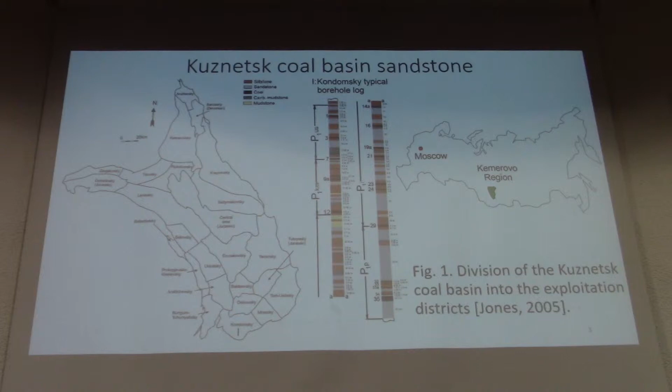So this is like the final aim of the work: to build the mathematical model which gives you an opportunity to describe this fracture process of the sandstone specimens. And of course other rocks also, because they may have different physical mechanical properties, but they obey some general trends of mechanical behavior.

Recently Farrokhrouz et al. reported data on the uniaxial compression strengths of sandstone depending on different pore content. As you can see, the scatter is awful to my mind, because you can have a discrepancy of the data plus or minus 100 MPa at the same porosity.

This scatter is obtained from data collected from, I don't know, maybe more than 1,000 specimens around the world from different sandstone deposits. In the Kuznetsk deposit, as you can see, we have pretty weak sandstone. If we plot this data on this scatter, it will be right here in the lowest part. But the discrepancy of data is not very high, so we can basically approximate this with an exponential curve.

What is going on? Basically, sandstone and rocks poorly can have tensile stresses inside of the material, but still, never mind - uniaxial compression tests are the most commonly used for investigation of rock mechanics behavior.

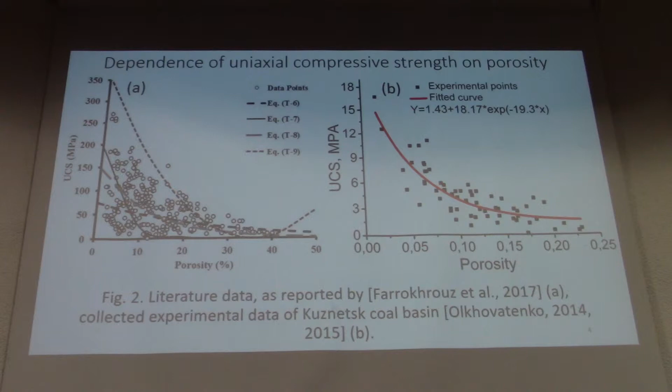What should we account for? The first step: we have to account for microcrack closure in the case of positive pressure, and microcrack opening in the case of negative pressure.

The second one, we need to more generally account for the pressure sensitivity of these materials. The next stage, we have to account for the dilatant behavior. We have to account for structural impurities, pores basically, and the next one, we have to formulate the yield or failure envelope, and then account for accumulation of damage, and what is more important, the corresponding degradation of the physical mechanical parameters.

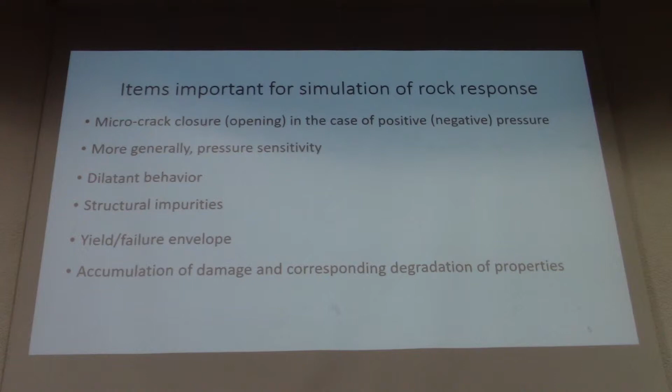Hoek and Martin recently reported this schematic loading diagram. In the beginning, as you can see, there is non-linearity, which is related to micro-crack closure. This is basically the first stage of simulation - somehow we need to describe this process. Here in the slide you can see this initial non-linearity, and right at this point, approximately, this micro-crack closure is finished.

So this is like a multimodulus theory, nonlinear elasticity, and one of the effective ways to describe this process is to account for the change of the bulk modulus of the material. Here, this is the current pressure, this is P0, the level of hydrostatic pressure when the microclosure occurs. And this is the phi parameter, the volume of microcracks which is closed under a certain hydrostatic pressure.

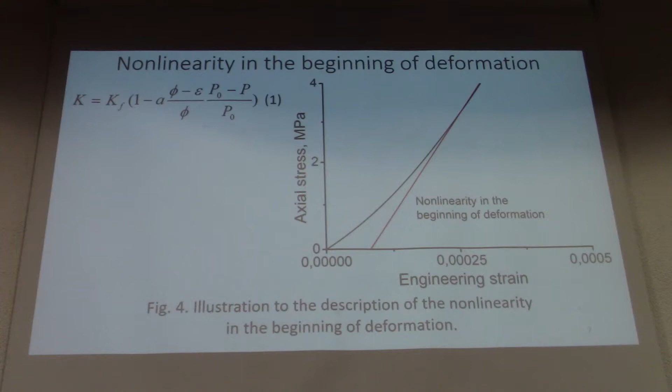That's what we have. If we use this equation, we can describe this initial nonlinearity. Here you can see the values of the parameters which I used in simulation.

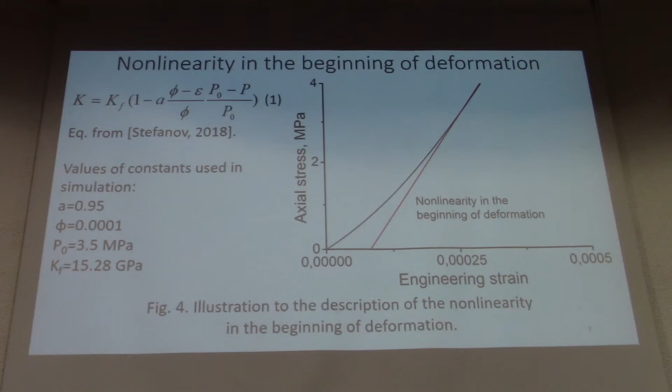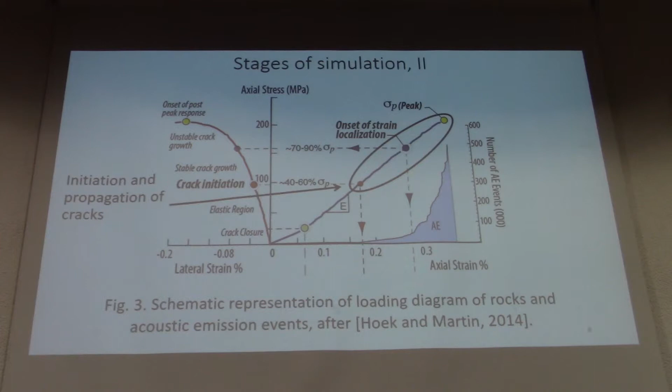The next one is basically the elastic region. It's not very interesting to my mind because nothing happens at this stage, it's just described according to Hooke's law. The more important part begins from the initiation of crack, which is basically 40 to 60% prior to the peak stress. So the next stage of simulation, we need to describe the initiation and propagation of cracks.

So how are we going to do this? As I said, we have to build the yield envelope, and as it is known that rocks basically obey pressure-sensitive behavior, one of the suitable models for description of their behavior is the Drucker-Prager yield envelope. We also utilize the non-associated flow rule, because experiments show that the dilatant factor and the internal friction factor both basically do not coincide.

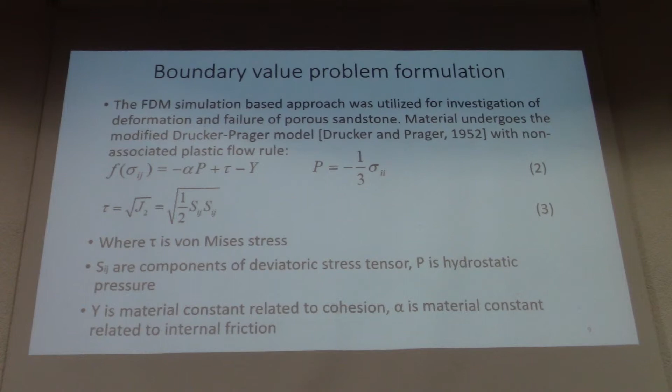What is next? If we take this non-associated plastic flow rule, it is written in this way. If we derive this equation according to the basic equation of theory of elasticity, then we get the increments of components of inelastic strains. And we have the increments of inelastic strain intensity and the increment of dilatancy. So somehow we describe this process.

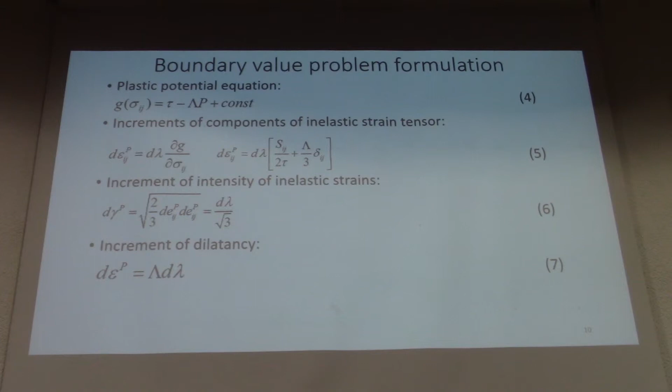What is next? First of all, the material could not experience infinitesimal expansion, that is why the dilatant factor and internal friction factor could not be left as constants. They need to somehow evolve during the deformation. For the sake of simplicity, I use exponential dependencies.

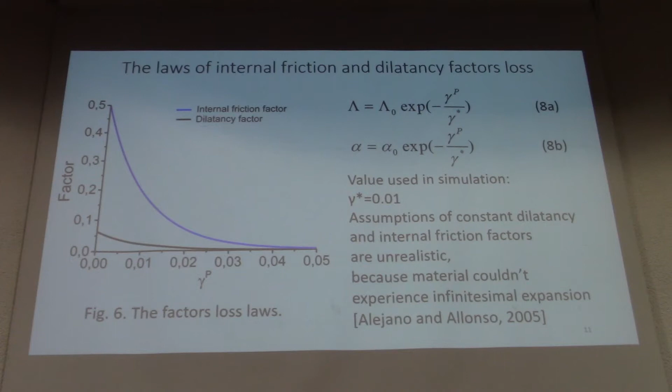And if the accumulated intensity of inelastic shear strains reaches the critical value, gamma star, then it means that the dilatant factor and internal friction factor decreased by E. This is referred to in this very good review by Alejano and Allonso. They picked up experimental data on different rocks, and it proves that these factors could not be left as constants.

The next one is we have to account for the damage accumulation, which causes the degradation of cohesion of the material. In this work we used this simple equation.

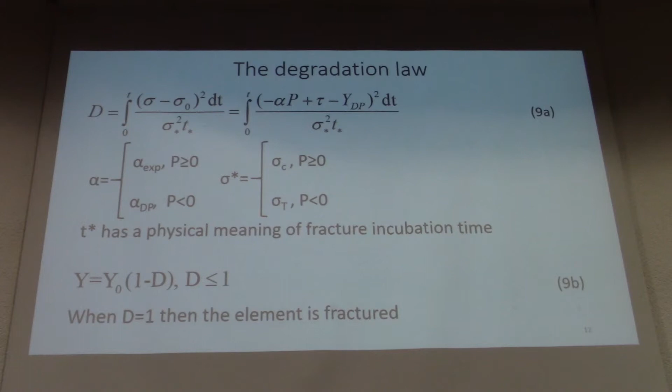The next one is the structural inhomogeneity, and also we can take a look at this publication. This is one of the reviews recently reported by Zhang, and what they found is they looked through different dependencies of the pores, and basically they obey the log normal distribution. Of course we didn't focus on the same deposit of sandstone as Zhang et al., but this is like a general law - the pores are distributed according to the log normal law.

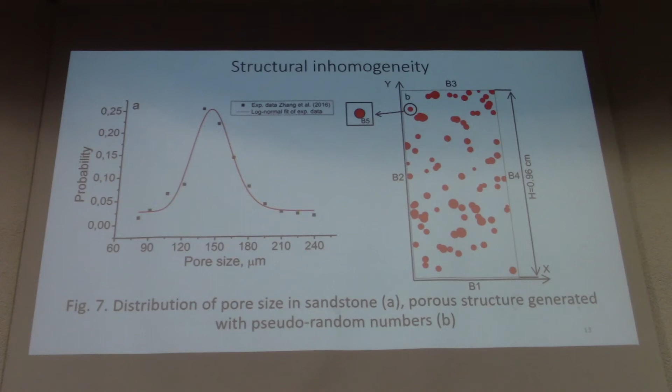If we take into account this distribution diagram and then use the pseudo-random number generator, we can generate a computer-aided design of the internal structure of the sandstone. If we use this diagram, we can have this structure generated and then use it for simulation. Of course this is like a model, because basically the pores don't always look like spheres, sometimes they have more complex geometry, but for modeling it's fine.

If we take a look at the actual compression, we performed a test simulation on this structure. It has approximately 12% porosity, and as you probably know, the real condition of loading lies between free sliding and confined sliding. So we performed both, and as you can see, in the case of confined sliding, the fracture process is more controlled by shear strains. There are also tensile cracks in the final failure pattern, but I would say it's more controlled by shear plastic strains.

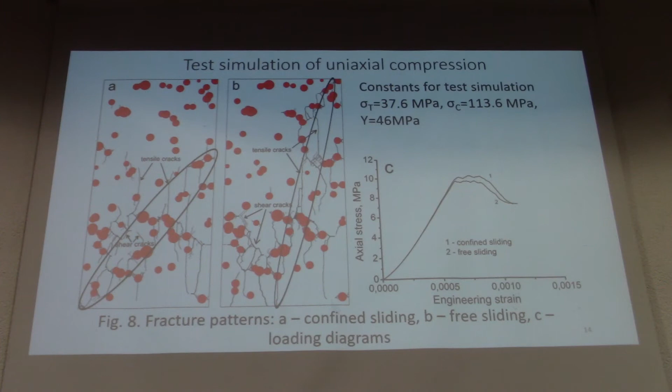In the case of free sliding, we generally have more tensile stress, so it is more controlled by the mode 1 fracture pattern. For the following simulation, I decided to stop on the free sliding case because, to my mind, it was more representative.

If we take a look at the stages of deformation: the first is micro crack closure, the second is initiation of cracks, the third is initiation of the softening region, and then we have coalescence of cracks and turn to the residual strength of the material.

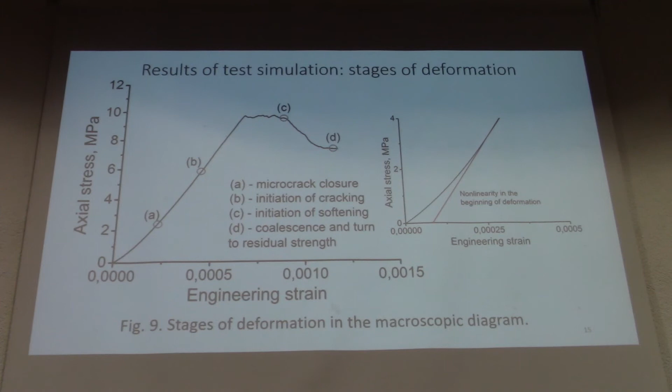If we compare these stages of macroscopic failure on the loading diagram with the fracture patterns corresponding to these points, we will see this: stage B is the initiation of cracks, then stable crack propagation, here the beginning of the softening region, and after that the unstable cracking and coalescence of cracks into the macroscopic one.

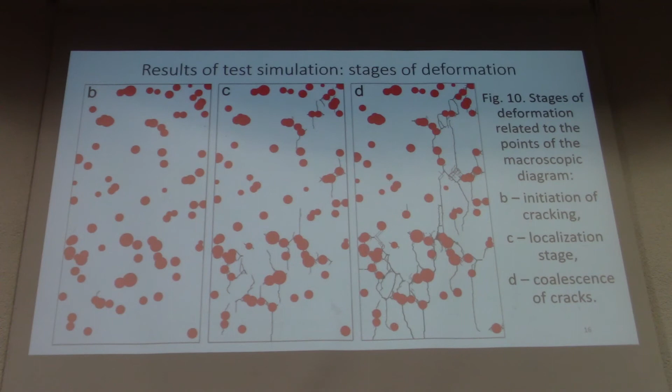Using this pseudo-random number generator, we can simulate different pore content and perform the same uniaxial compression test. We changed the porosity basically from 1%, and there is no diagram here, but from 6% to approximately 25%.

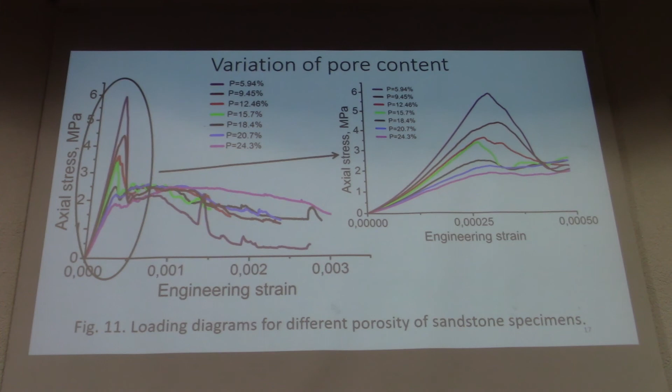What is more important, to my mind, is that if we take a look at peak deformation, not only peak stress, we see that increasing porosity leads to more viscous behavior of rocks, because the critical strain appears higher in the case of porosities higher than 20%.

A few more slides and I finish. If we plot the dependence of Young's modulus on porosity, it is pretty well described by an exponential function, and the dependence of uniaxial compression strength on Young's modulus is described by a polynomial function of the second order. Sometimes it is described by a linear function, so it depends on conditions.

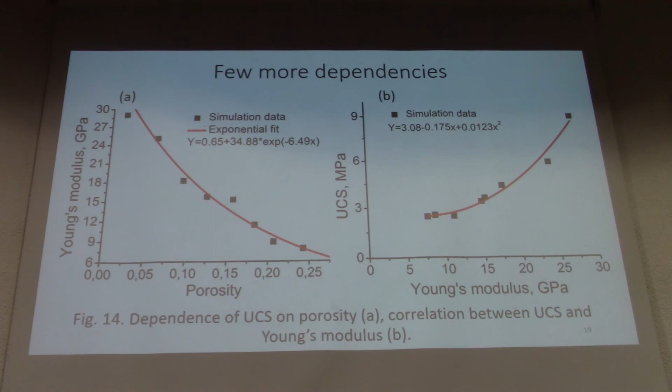One more thing I wanted to show you: a simulation of acoustic emission. If we calculate the counts of fracture, we see that the highest rate of energy release occurs on the downfalling part of the loading diagram. Then, when we return to the residual strength, this energy release rate basically decreases.

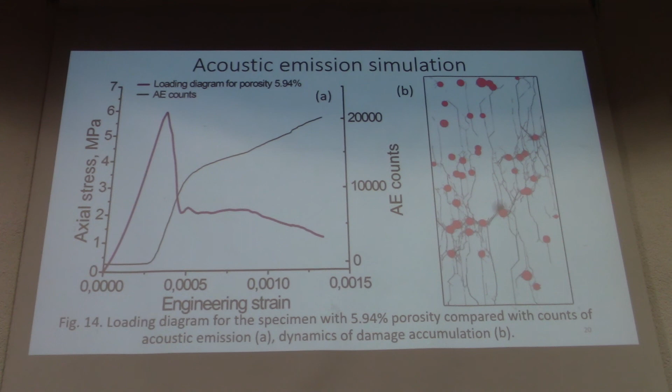I've also prepared a short dynamics of the damage accumulation. Take a look—there are not so many frames, but still take a look at the dynamics of this process.

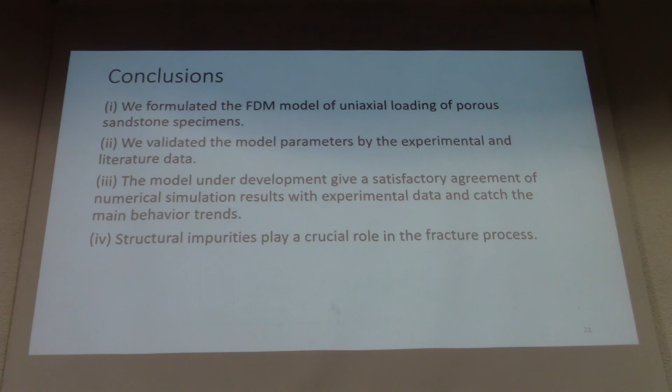So, to the conclusions: we formulated a finite difference model of uniaxial loading of a porous sandstone specimen, validated the model parameters by experimental and literature data, and the model under development gives satisfactory agreement with experimental data. Structural impurities play a crucial role in the fracture process because they are responsible for the occurrence of tensile stresses in regions where the curvature of the internal structure changes. That's basically all I wanted to tell you. Thank you for your attention.